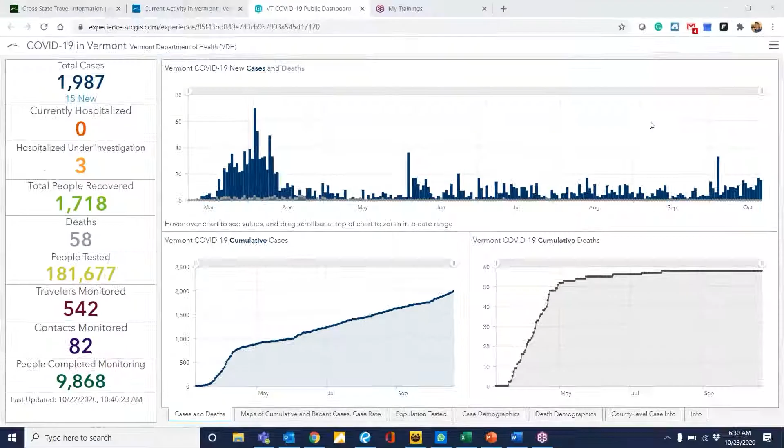Today's looking like a beautiful day, calling for partly sunny, highs in the upper 60s, might even hit 70 today. A little bit of a blustery wind, 15 to 20 miles per hour out of the south, so a little gusty. Watch out for those crane operations out there.

Starting off this week with COVID, as you can see, we had a big spike October 4th, but really in the last 2 weeks or so we're starting to see our average daily count double to where it's been since the beginning of this thing. So it's definitely prevalent in our area.

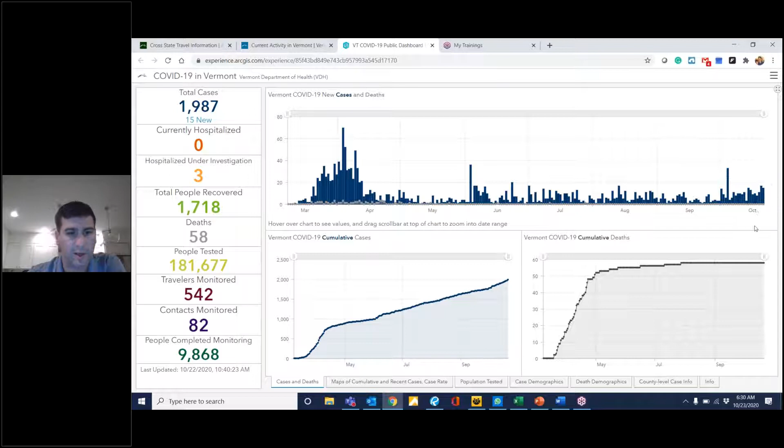You can see on our map, in the last 14 days Chittenden County and Washington County have been the hardest hit areas. Those are areas we should watch out for and remember best practices: social distancing, good personal hygiene, and relying on PPE, covering up and wearing a facial covering. So it's good to keep an eye on it and not get complacent. It's going to be trickier and trickier as we're seeing there.

Just the common colds are spiking up. There's a lot of sinus infections going around, so it's important that we get it diagnosed. Utilize your primary care when you can to get it diagnosed, so the conversations between you and me aren't going through all the signs and symptoms. It's very important that you talk to me about what's going on, what your symptoms are, continue to check your body temperature, but let's utilize those primary cares and walk-in clinics if we need to, and Champlain Medical, to get a diagnosis of what's going on. It's going to be important as we continue throughout the next couple months into the winter.

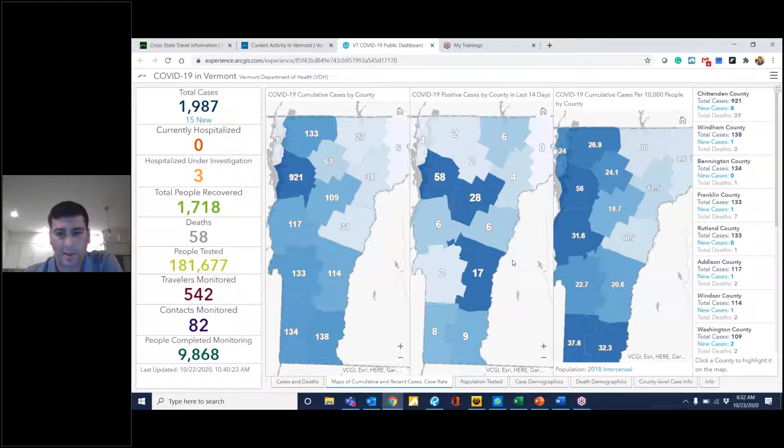This week's code of conduct is don't overpromise or underdeliver. It's a very good tactic to be truthful and honest with one another, and especially if you're running late or talking about getting something done for somebody, try to do your best to estimate how long that might take, or those tasks that you're going to do for somebody, so we can be as efficient and get things done in a timely manner as best we can.

Safety news this week, again excellent job - another 7 days without a recordable injury, our count's up to 80. Would have to say this week has been an awesome job by all. The JHAs being submitted through Teams, we're pretty much at 100% compliant with all of our projects. Excellent job, our new system seems to be working very well, so let's keep it up. Let's keep identifying those hazards and putting up proper controls and safety measures to all the workforce, so everybody goes home safe and sound each and every day.

This week I wanted to talk about Silica. Silica is a new standard that was put out in 2016, so it's only been about 4 years since this has really been an obligation to the construction field to follow these mandatory guidelines. And the reason why the Silica standard is in place is because of silicosis - they're seeing a lot of fatalities for Americans regarding cancer to the lungs, called silicosis. This is something that's not curable, but it's very preventable.

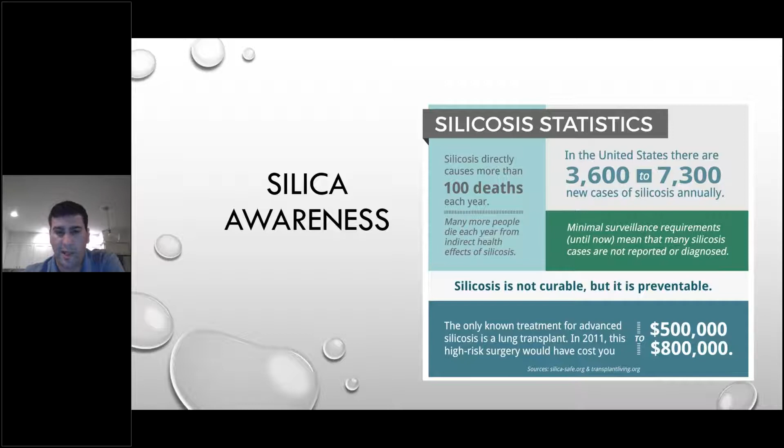Hence why the standard is put in place, because a lot of construction workers and industrial hygienists, the general industry, we're seeing a lot of these similar types of lung cancer. Doing a lot of investigation, OSHA determined that it was largely due to overexposure to workers. We're still seeing a high elevated count in the United States, about 3,600 to 7,300 new cases of silicosis annually. This standard's new, but it's going to hopefully prevent and drop these numbers in the years to come. So it's very important that we take care of the dust, the concrete dust, the stone dust, all that stuff that we've been doing over the last couple of years. Our system is working well.

We have a pretty robust silica best practices program with all the Hilti tools, and all the other tools that have integrated water systems. For us, it's following Table One that we've talked about at length over the last couple of years. So continue to follow best practices while taking care of dust by using an integrated water system or dust collection system. That makes up about 90% of all our silica exposure control.

All the Hilti tools are available in Bill McSweeney's office if they're not in the tool crib, and all the other tools with integrated water systems are available in the tool crib. So all we have to do is plan ahead, utilizing those JHAs. If you've got silica exposure, let's figure out how we're going to protect the workers from the silica dust.

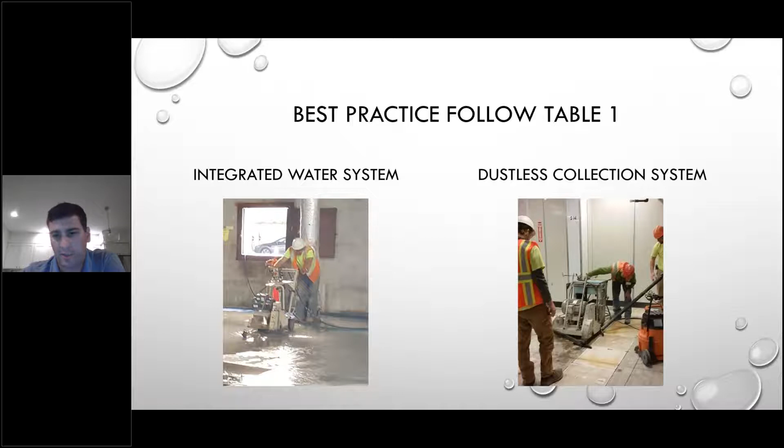That last 10% is the alternative methods. This is something being cited more now since the standard's been out for the last 4 years. We're seeing more construction contractors being cited for not having alternative methods covered. The reason is because we do not want to expose the workforce to 50 micrograms per meter cubed for an 8-hour day. So if you're following the table, which we are to a T, there's no further testing needed because that's all been done through the standard.

But if you deviate from the standard, you need to do some personal air monitoring, sampling the tasks you're doing to make sure you're below those thresholds of 50 micrograms per meter cubed, or 25 micrograms per meter cubed which is our action level. So at 25, we need to start using some of the hierarchy of controls, but at 50, we're breaking the standard. So we do have 2 personal monitors.

We've done a lot of air sampling this construction season, especially down in Cavendish on a project we're doing with a heavy amount of grouting. So we did some personal air sampling, and all of our numbers came extremely under the action level. We're seeing about 5 or 6 micrograms per meter cubed for the grouting operation, so it's a very successful test study.

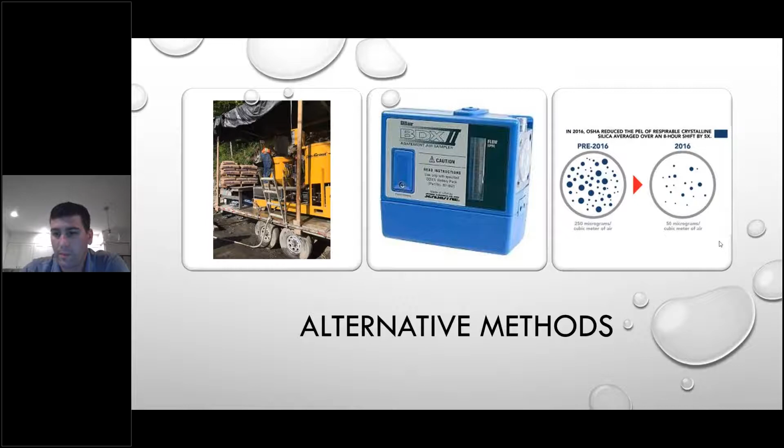Here we go. So for announcements this week, just keeping this cold weather reminder on the notices. Start treating your fuel and winterizing pumps, and keep it in mind, especially on weekends. It sounds like weather may not be bad this weekend, but I'm not sure. There could be some frost later.

Didn't seem like it, I didn't notice on the forecast. So since October is Breast Cancer Awareness Month, this week I put in the website to the UVM Medical Center Breast Care Center. Check it out, it's got a lot of interesting and good information. It's quite a program they have at UVM, so it's really nice to have something like that right here in our backyard.

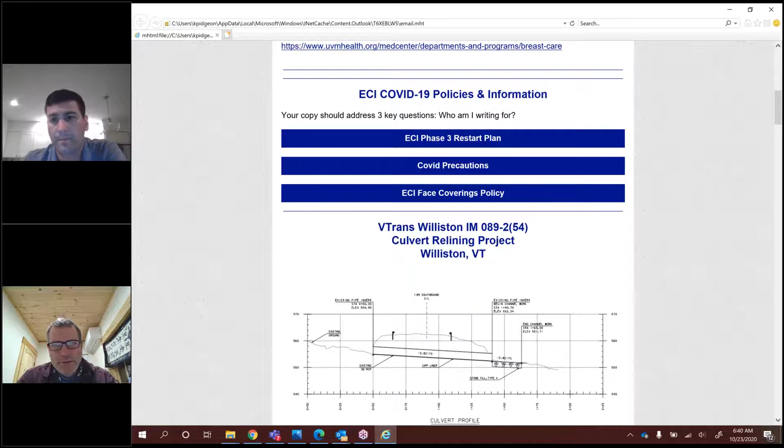We had the COVID policies and information here. Oops, I don't know if my screen is changing. Did my screen change color there, Matt? I'm having a little trouble with my screen. Nope, we still see your screen perfectly fine, Ken. Okay good, as long as you guys can see it.

So for this week, we're profiling the VTrans Williston IM 089-2(54) project.

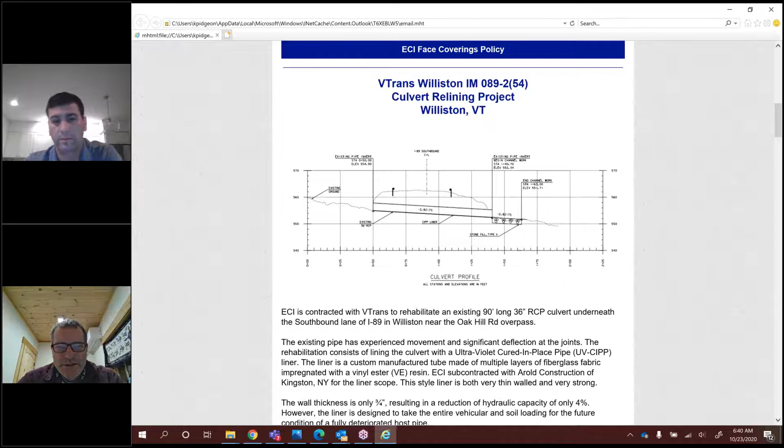This is a culvert relining project on the interstate, I-89 in Williston. The first image shows a profile of the pipe we're rehabbing. It goes underneath the southbound lane and connects to the median from the outside shoulder. We're contracted with V-Trans to rehab an existing 90-foot long, 36-inch diameter reinforced concrete pipe underneath the southbound lane of I-89 near the Oak Hill Road overpass.

The existing pipe has experienced movement and significant deflection at the joints. The rehab consists of lining the culvert with an ultraviolet cured-in-place pipe, a UV CIPP liner. The liner is a custom manufactured tube, kind of like a sock, made of multiple layers of fiberglass fabric impregnated with a vinyl ester, a VE resin.

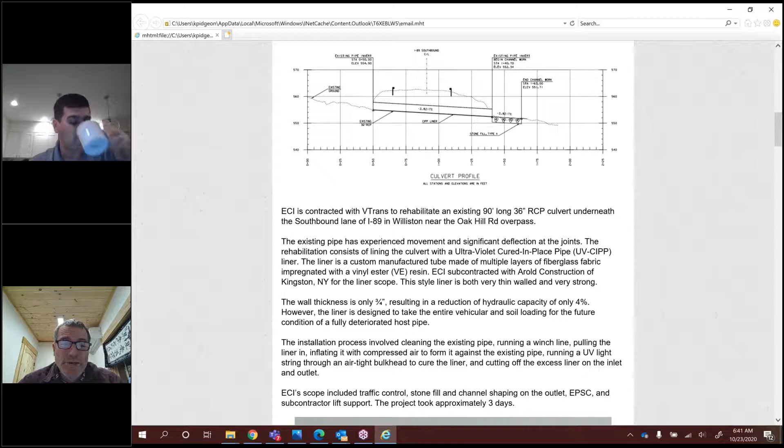ECI subcontracted with Arold Construction out of Kingston, New York, for installing and providing the liner. This style liner is both very thin-walled and very strong. The wall thickness is only about 3/4 inch and results in a reduction of hydraulic capacity of only about 4%. However, the liner is designed to take the entire vehicle load and soil loading for the future condition of a fully deteriorated pipe, so the pipe can disappear and the liner still has structural integrity for all the loads on it, with only a 4% reduction in hydraulic capacity.

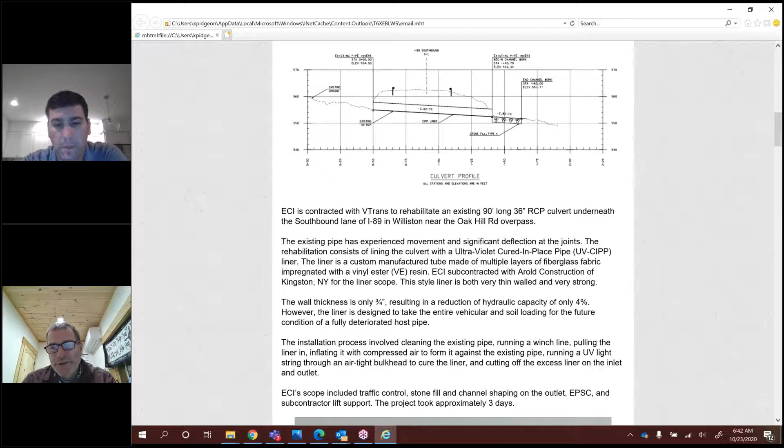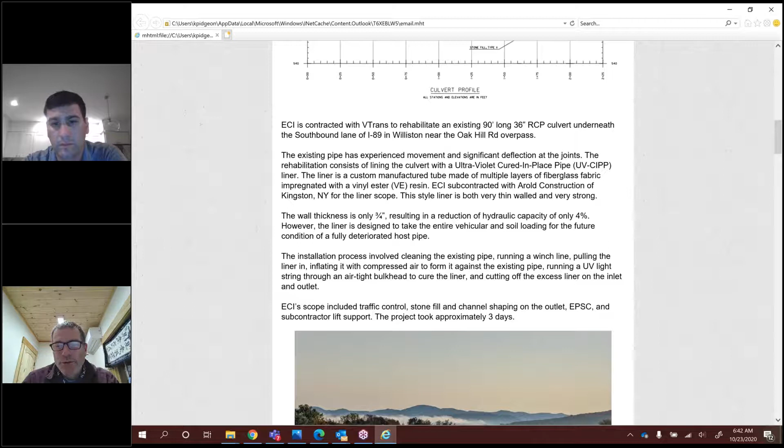That's pretty good. The installation process involved cleaning the existing pipe, running a winch line, pulling the liner in, inflating it with compressed air to form it against the existing pipe at somewhere in the 2 to 4 psi range, just a slight pressure. Then running a UV light string through an airtight bulkhead to cure the liner, and cutting off the excess liner on the inlet and outlet ends.

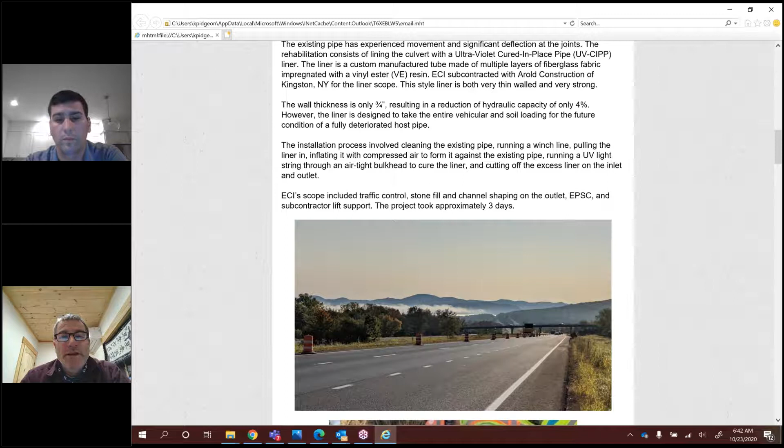ECI's scope of work as general contractor included traffic control, stone fill, channel shaping of the outlet, EPSC (erosion prevention and sediment control), and subcontractor support. The project took only about 3 days, so it's pretty in there and out of there.

This first picture is the interstate, looking towards Mount Mansfield direction. You can see the Oak Hill Road overpass in the middle of the screen. We have barrels set up, so the access was made to the passing lane side on the southbound, and we're looking southbound.

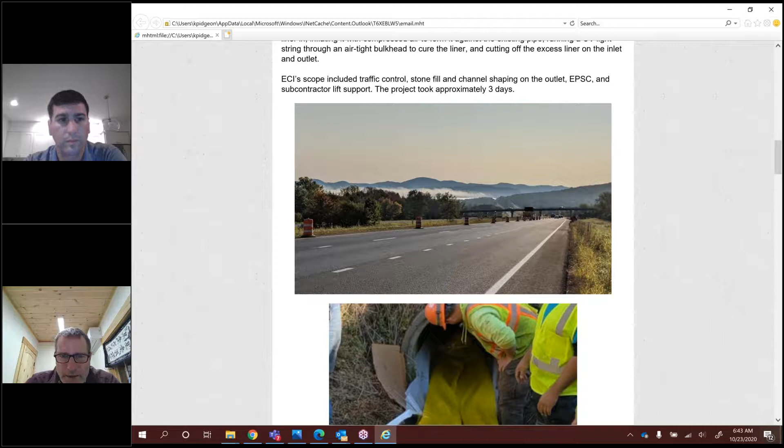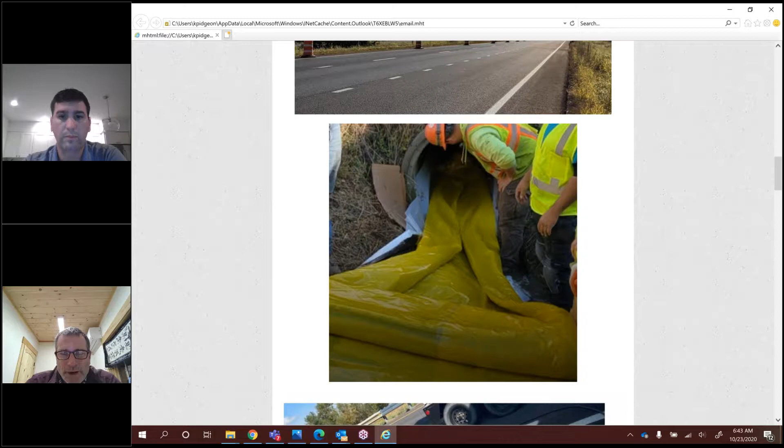This is when we're pulling the membrane in, this sock-type thing, dragging it into the pipe. Those are our subcontractor guys there. Once it's in, we pull this little chain or train of UV light strings through on rollers.

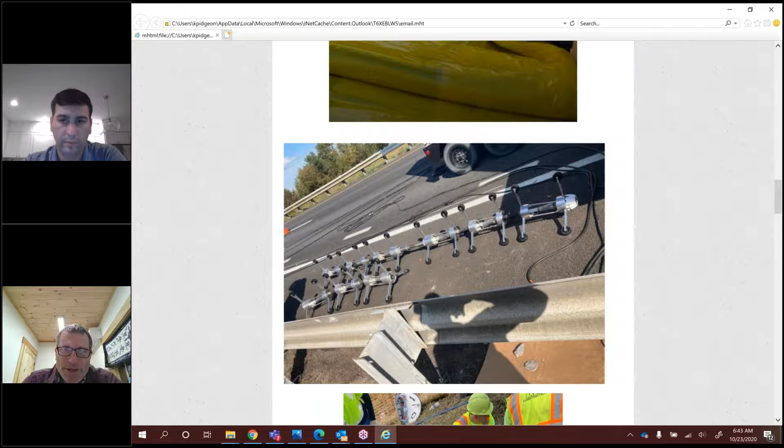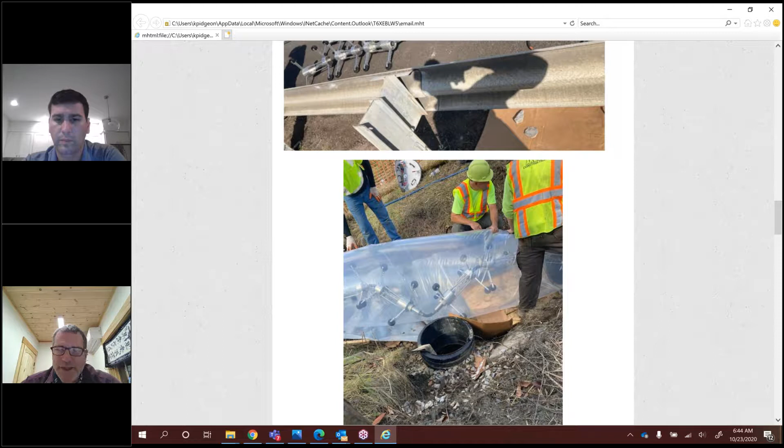To do that, we have to put it into a slightly pressurized system. It looks like they just put a bag around it - I wasn't there to see it, but it looks like they used a large plastic sleeve to keep a pressurized condition for the transition, where the pressure is already holding the sock open against the pipe. The next step is to get that string of lights in, a neat little way of getting into the pressurized system.

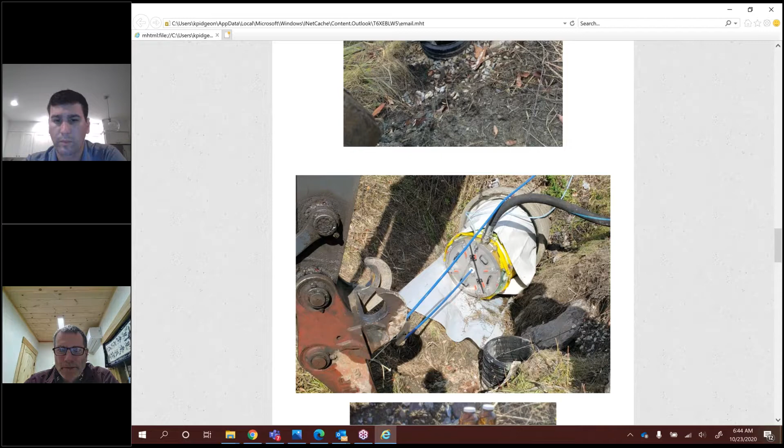Here's the bulkhead at the other end. They're pulling the light string through at this moment. And there it is after it was installed and apparently hardened - I don't know how long it has to cure, but probably pretty quickly once the light is exposed to the resin.

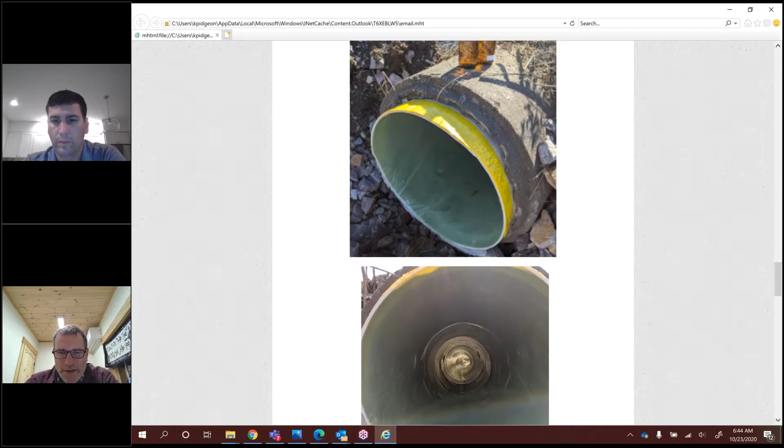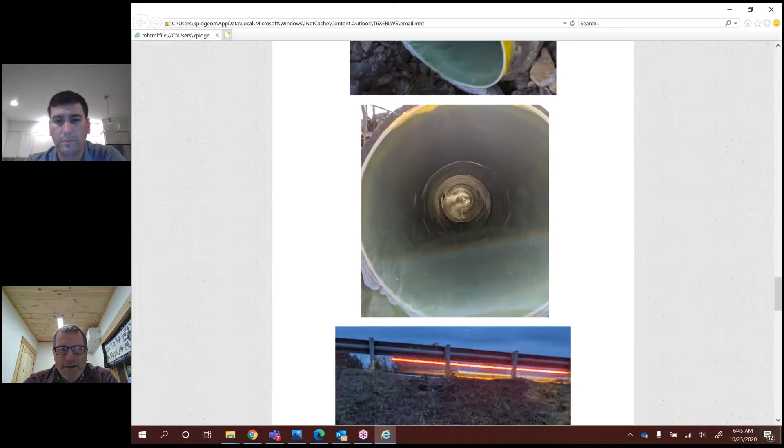You see there's a slight bend in the pipe here - it has moved over the years, which caused the joints to open slightly. There it is at the outlet end, and then after it was all completed, rip-rapped and shaped on the outlet. Looks great, pretty cool that it can be done in just 3 quick days and doesn't really disrupt the highway other than a lane closure.